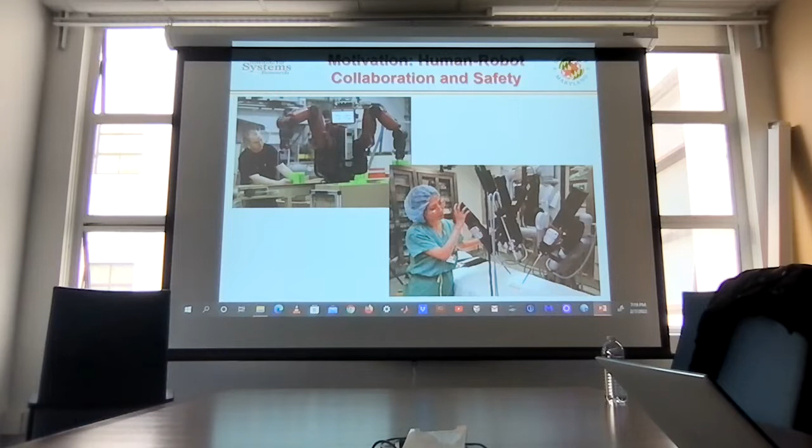We also work a lot on the fundamental problem of teaching robot tasks. We have a way to do it we think is more robust. And in this context, of course, human-robot collaboration is very important. And one of the issues that I talk a little bit about is what do you mean by teaching and how do you do it in such a way so that you can teach in one environment and transfer it to another easily, and you can teach one robot and transfer it to another, like you do with humans, okay? And there are some nice pictures about collaborative robotics, both from commercial and medical.

And for those of you who are in networks, this is also applicable to current communication networks, like especially 5G, 6G, and next generation, because the new topic in networking is autonomy. You try to do the management of networks autonomously, and that should be very, very good news for control people, because everything now has become software control, thanks to software-defined networks, network function virtualization, and the like. In a simple language, we are making the entire network virtual, and everything that you do is actually a control problem. You don't worry about the hardware anymore. This is thanks to Nick McKeown, who did it for core networks, and now we're extending it to 5G, and there's some very interesting problems there. That's why I put that slide there.

So the key challenges are, safety, of course, is very important for trusted autonomy, and what can be learned. And you all know from your student days that you don't learn if you don't make mistakes, right? If everything goes rosy, you don't learn much. So one of the issues is, can you actually push the system to the limit of learning, but not faulting? And that trade-off, in my opinion, has not been understood, it has not been studied a lot, about how do you learn more by pushing the system to the learning and then learn and go on.

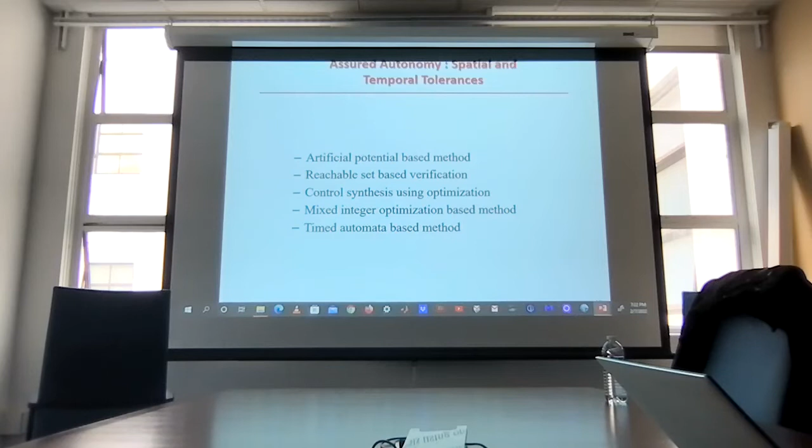Okay. So there are several methods. You can do autonomy for single or multiple systems. We have done all the work on artificial potentials with Xiaobo Tan and others. There's, of course, the work on reachable sets and appropriate verification, the barrier functions that we do here, also with reachable sets, and control synthesis using optimization, including logical constraints that lead you to mixed integer programming. And if you are into model checking, actually, you can do that with model checking like UPPAAL and so on and so forth. And I'll touch on these things, okay?

So let's go to the old work. You have a bunch of robots, and they try to go to the target. They try to avoid the obstacle. The selection of the obstacle to have a cusp is special. You will see why. Because the robots are going to get caught there. Okay. So you try to do the old approach where I do potentials and combine them, like you see here, with different coefficients. They sum up to 1.

And you have a target potential that attracts you. You have potentials that try to repel each from each other. And you have objects that try to repel you away, and so on and so forth. The problem, of course, with these methods is that even if each of the potential functions is convex, the combination is not convex. So you get into local minima and all kinds of problems.

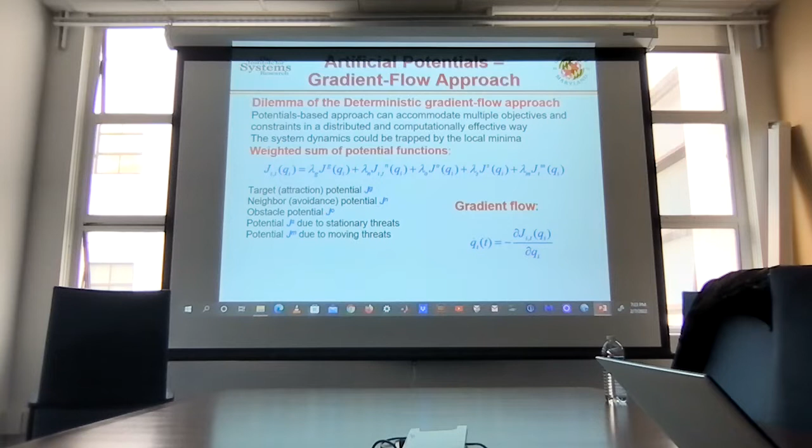So what we did is, as they say in optimization, be wise, randomize. Okay, so we randomize the problem instead of doing the gradient minimization. Instead of minimizing V, we maximize e to the minus V. So you go into large deviations and these problems, and you get to randomized algorithms. The penalty we pay, of course, now is that your constraints are going to have some probability of being violated. But we saw with Xiaobo that this leads to path optimal solutions. Okay? And I'll show you with pictures. It's a remarkably simple theory.

All right. So then I can move around with the potentials that you see on the right-hand side. And I'm exploiting the fact that I have a Gibbs distribution. And basically, I move around by throwing dice that are loaded accordingly. Remember, I told you minimize V, maximize e to the minus V. V has a sum like that, so it depends on these local potentials. Okay, so this works pretty well. And this is inspired by similar methods in image processing. We have the name Gibbs sampling, all right? So it's the same idea.

This is old work. There are 2 papers in Automatica, and you see what happens. You go to one place, you want to go somewhere else, you create probabilities, you throw your dice, and you move, okay? Statistically, all right? And there's a very good analysis of that in these papers, and you see what happens. Now you don't get stuck, but you pay a price. The price is that this is slow because they keep searching. So you don't do exploitation, you do just exploration, and that's too slow.

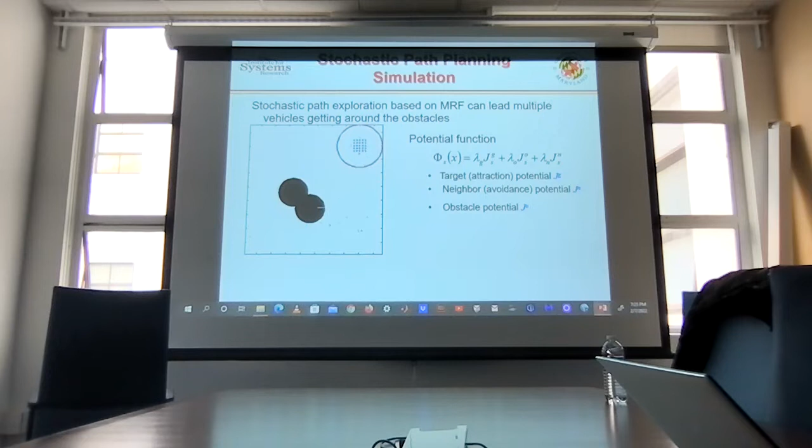So we did a mixed method where you do exploitation for a while, and then exploration. But we still don't have a method where you switch from exploitation to exploration automatically. We just put it in, okay? So the simplest example is I tell you there's a very nice restaurant downtown in San Francisco. You use your map, you go in the area, you don't see the restaurant, you start looking around, okay? That's a very simple example. Now, these methods are extremely simple, and you can make the collective do all kinds of things, like figure 8s and so on and so forth, lines, by very simple potentials.

I'll show you some here because that's old work. We are revisiting for various reasons. Let me see. Okay, that's the rendezvous point where you tell them where to rendezvous, and the other one you tell them just get together, and you see what happens. They first cluster in groups, and then the groups cluster. And there are various things we're looking at.

This we expected. The remarkable thing is that we proved in the thesis of Wei Xi, who is with the company here in California, and then people at the U proved the same thing, that the methods are very robust to the functional form of the potentials as long as the functional form has the right qualitative characteristic.

Okay, so as long as the potential is like that, if you want to keep people away or like that, the actual functional form doesn't matter, which means that I can actually fit arbitrary functions with very simple measurements. So some people have done like measuring just the distance and then fitting an appropriate distribution and then running it, okay? And even more so, you can actually take the gradient and interpret it as even simpler.

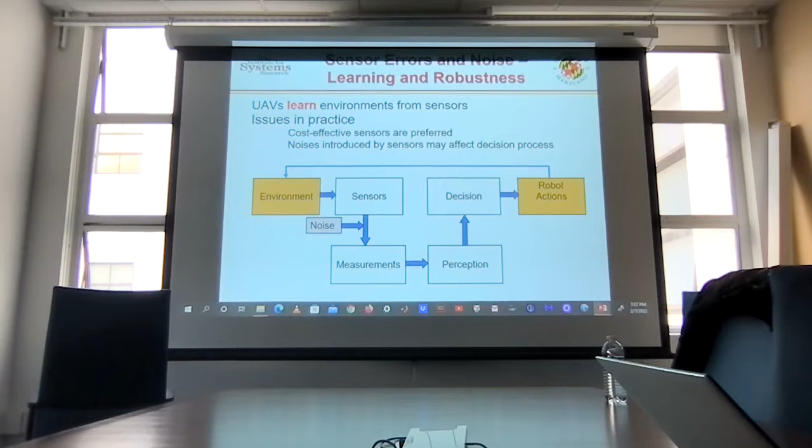Because we work on another project, trying to recover the collaboration laws of ensembles in recent work with DARPA and Park from birds and UAVs and so on, we saw that there's no uniqueness in this construction, but this is not weakness, it's actually robustness. Because if you have many potentials that give you the same trajectories, you now can ask yourself, what is the simplest form? So that's one method, okay?

The second method is the one you know about, reachability analysis, in terms of constructing tubes and then following these tubes of the nonlinear system. Here we use the zonotopes of Matthias Althoff from Munich, but you can do others. You can use ellipsoids. Essentially, you look at the tube and you take slices and you try to project it.

The more recent work we are doing in this area is inspired by the modern cars that you see. You have a big screen in your modern car, you see a tube in front or back when you park. This is actually a tube. So we try to do it faster and use it as a method to drive the car or many cars and so on. And you'll see this later. There's still very active work in this area, trying to make these computations fast because currently they're not.

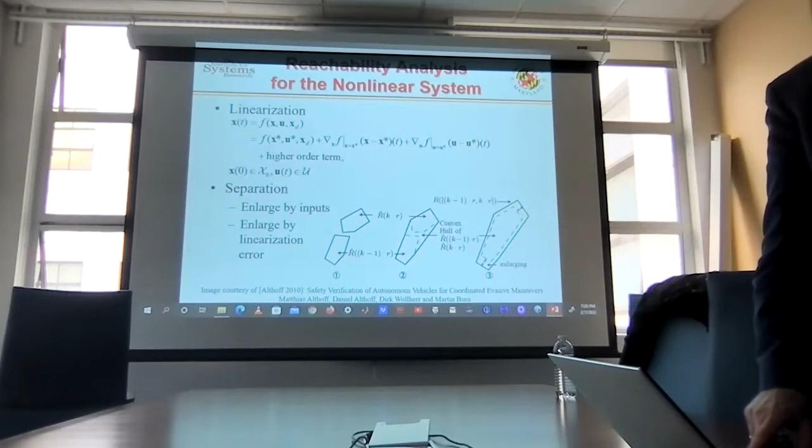So here we're trying to calculate these reachable tubes from two aircraft in such a way that they avoid each other and they allow a maximal set of controls that satisfy these tolerances. If you find that first, then you can actually find the controller so that you do optimal time and so on. Okay, so there have been many approaches to that problem.

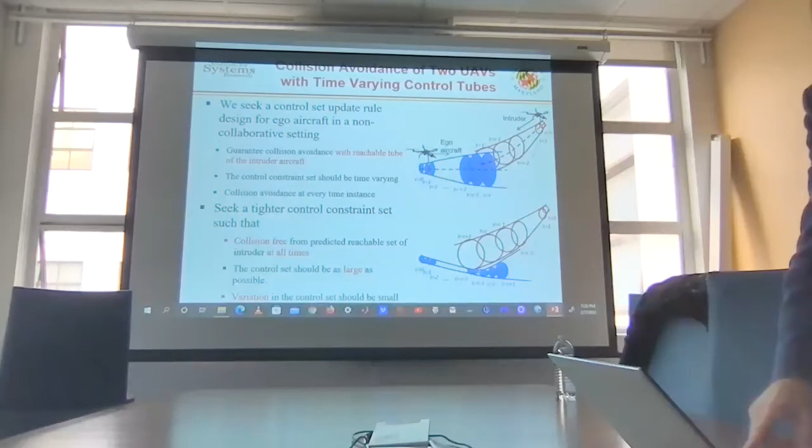We use MTL, metric temporal logic, or metric interval temporal logic, for the simple reason that my constraint is I want to go through this door in 10 minutes plus or minus 2 seconds, and I want to allow some tolerance from the border of the door, like 10 centimeters, okay? So it's finite time constraints you have, not I want to go eventually to the door. And this is captured by MITL.

Of course, the difficulty is that even in MITL, you don't always get timed automata; for some subclass you get them. So the problem is a bit more difficult because definitely for metric temporal logic, you don't get timed automata all the time. But we use an old method that I think was done at Caltech and other places where you take the logical constraints and you turn them into integer constraints.

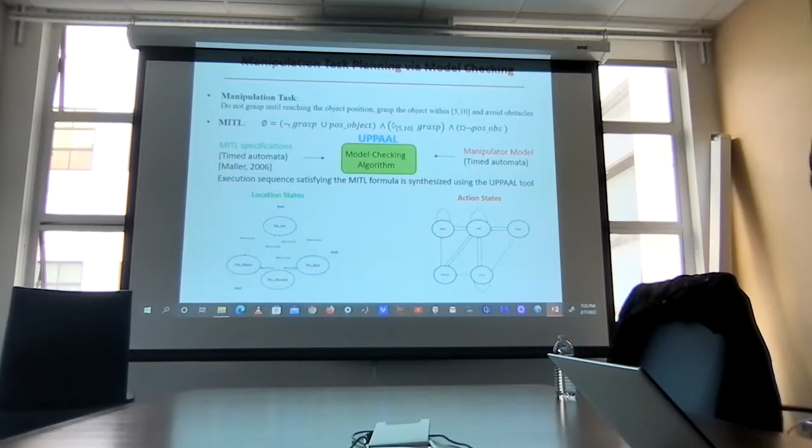So, for instance, on the left-hand side, you see a timed automaton characterizing the movement, the location states. And on the other side, I have the action states, like I move, I hold, I grasp, and so on and so forth. Both of these are timed automata. And then I can put this into a model checker and find out if there is a possibility to find a path to execute this with certain constraints. And you get this model checker in UPPAAL for this problem where this robot is trying to grab something from the left-hand side, go over the object, and put it over there.

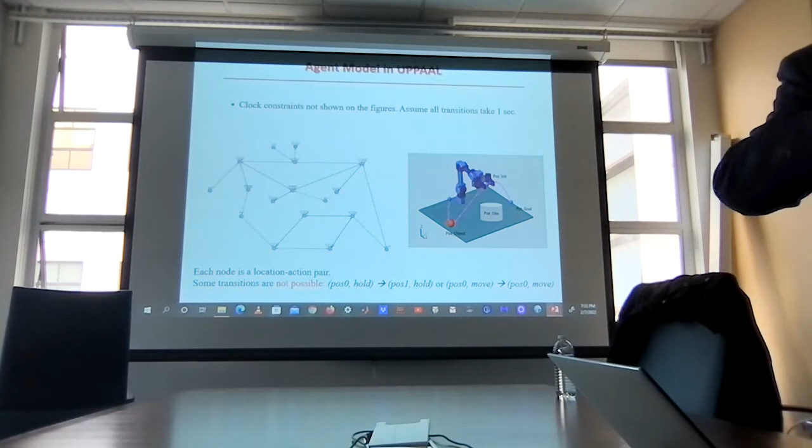And the model checker, as you know, if you know model checking, not only will tell you whether it is possible, it may provide a counterexample, or it will give you a fix. That's why we like them. You get these kinds of answers for the path. And if you can do this in your head, I'll give you a big prize. So you get another alternative of doing the same problem by using these model checkers.

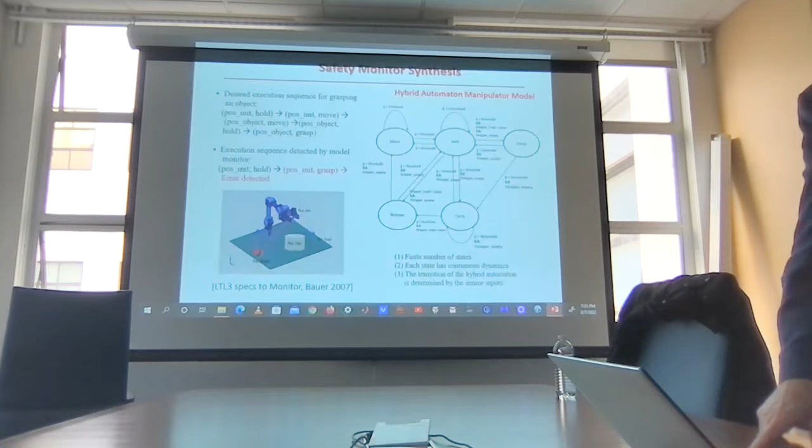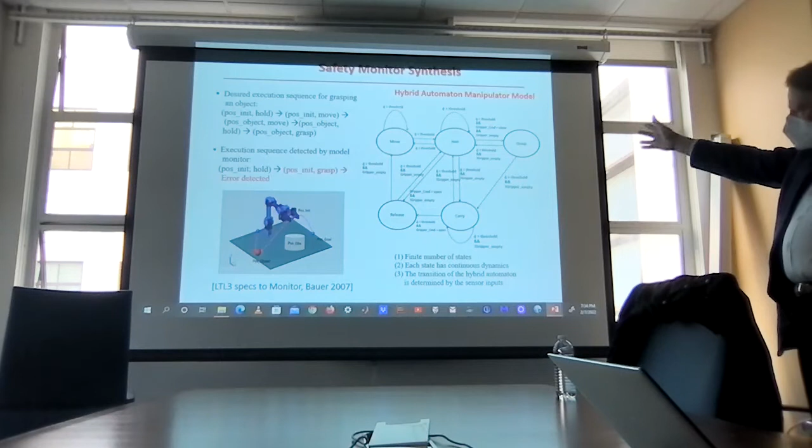And then the interesting thing here that we do with my students, one of whom is now at Google, is that if you have such a model, you can actually create a hybrid automaton like you see here, again of the timed automaton type, but now you can build an automatic monitor of the automaton, and that monitor is an analog, if you like, of an observer from systems, right? This logical system, which you build automatically again, monitors the execution of this task, and it can alert you if things are not going properly and so on and so forth.

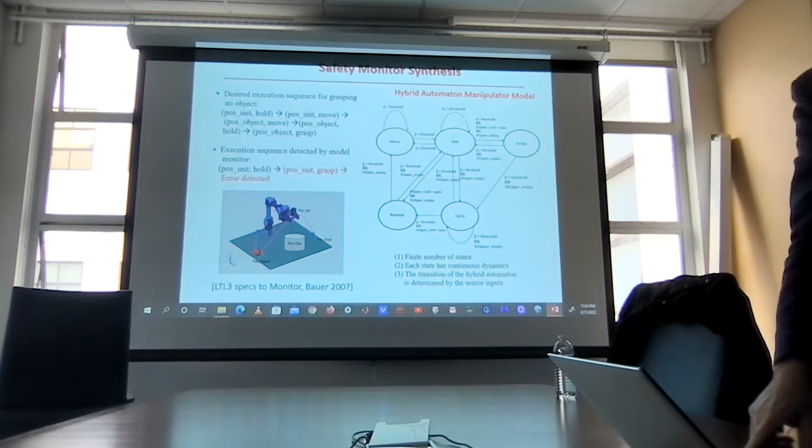So, for instance, here you see this monitor, very simple. It checks whether some state is a bad state, or some of them are alarming, or some of them are good states. You can use these automatically synthesized monitors for monitoring, or also as a base for reinforcement learning later on, if you want, with these hybrids.

Okay, so it's a first step towards this time and space synthesis, and you can actually put this together and even understand problems like this, where you have nonlinear dynamics and you have an STL fragment of the constraints, like I have here, and then you can use this to actually get event-triggered control in the sense that the triggering is when something is not as planned.

Okay. So when we say trusted autonomy, in the most general sense, in our work, we mean that the task execution is not as expected or as planned. Something is not going right. And that can be because the environment changed, because the model that you have changed, or because the way you're doing it is not right. And you have to figure all that out.

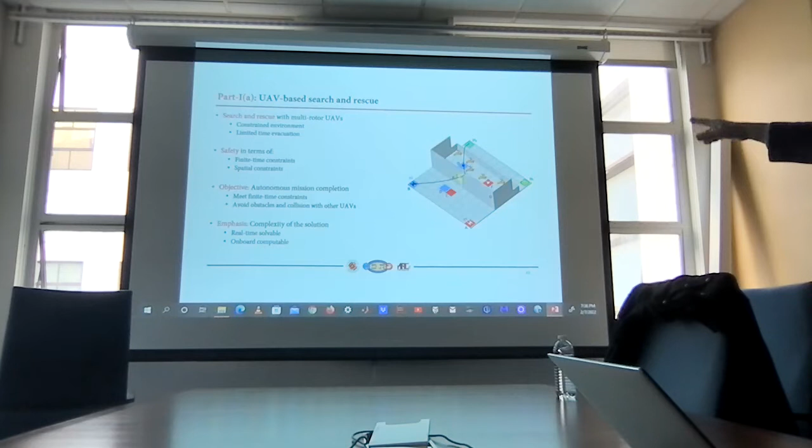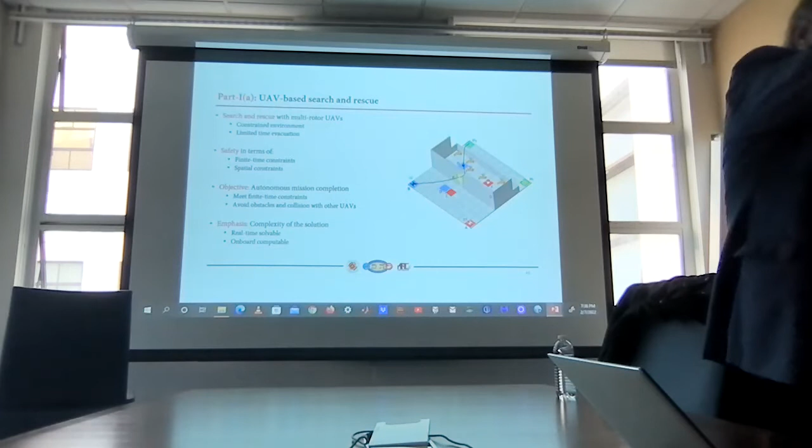Okay, so in the search and rescue, there's this problem. Of course, safety is with respect to passing through the window with some space tolerances, but there are multiple problems. So suppose the UAV goes to the window and finds out that it cannot fly through the window that way, it has to do that, and it calculates it doesn't have time to do that. So what we do in more recent work is the first UAV tells the second UAV that it has to do that, goes around, this one turns, goes through, and the other one comes back. So it's much more complicated logic. You can do all these kinds of problems.

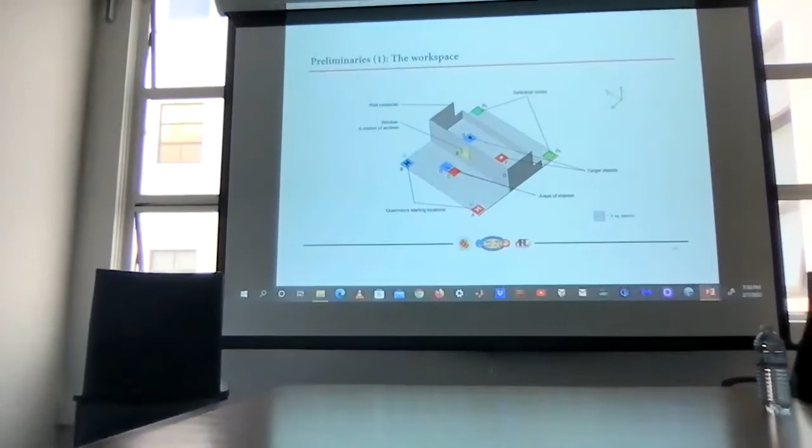So this is the model. Okay, so now you exploit the atomic propositions in this logic, and you take the statement you have on the left for MTL, right? And you use the semantics and you decompose the global logical constraints to individual constraints, okay? So that's the constraint we have on the bottom. And these then give various constraints for each of the UAVs.

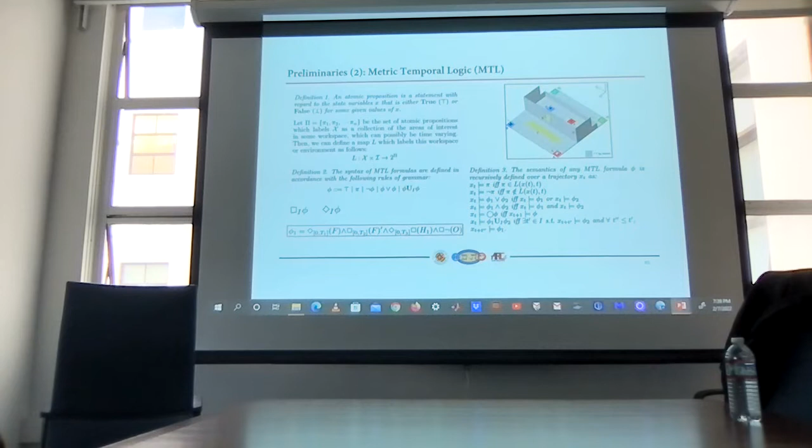And I think this is coming up. Yeah.

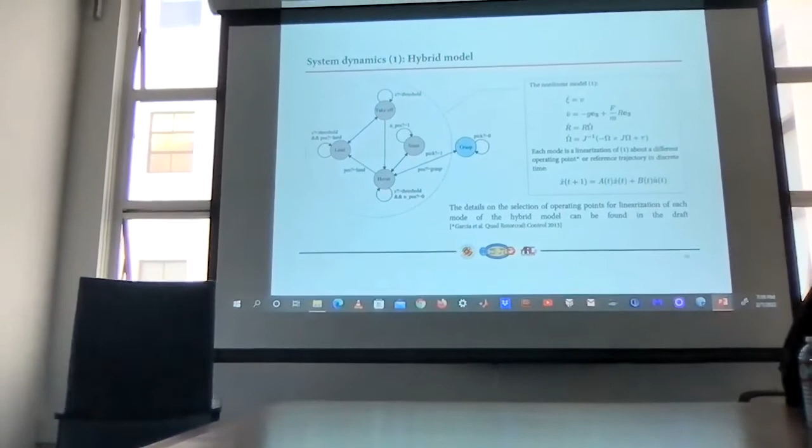Okay, so the system dynamics is a hybrid model that shows you the various functions of the UAV. I take off, I land, I steer, and so on and so forth, grasp. You have the classical model of the UAV, which many people are using. And then you have the Baras model over here. And you take the object, you put them together, you have identified the automaton. Okay, and every UAV can satisfy that.

So here is the mission. I write a formula down in metric temporal logic. Every time you see these subindex intervals, that's the difference between LTL and MTL. And you have to find the object location, then you go to the safe location, and so on and so forth. And for instance, for quadrotor Q1, the corresponding mission looks like this.

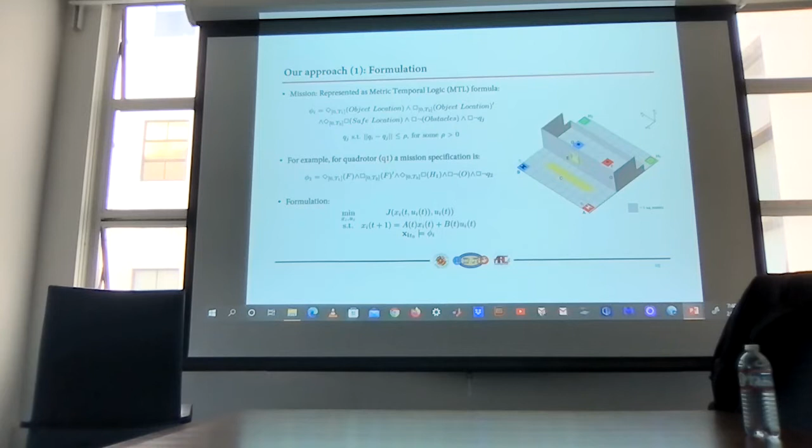And you can have this problem where for each UAV, you see there's an i there, you have an optimization, its dynamics, and the logic for that UAV. Okay, so I decompose the big problem using the decomposition of the logic into subtasks for each UAV, solve the corresponding problems, with several papers that we have on that, and then you put them back together. So given an MTL specification, there are decompositions for each of the UAVs, and then I can solve this problem and put it back together.

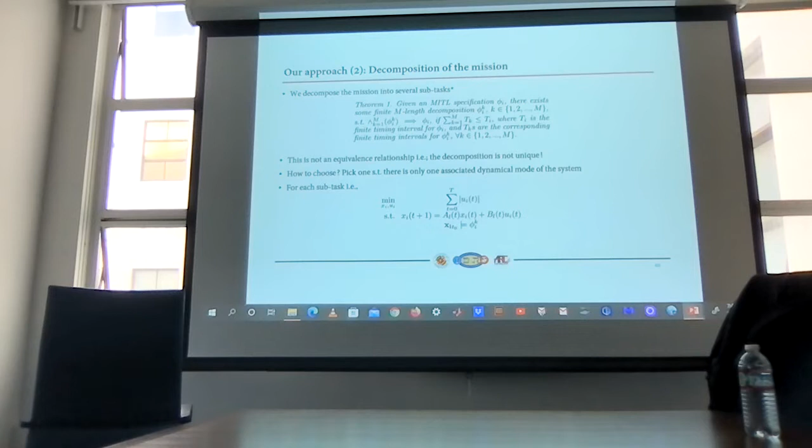There are things you have to choose here, including the time horizons for the sub-problems and then how to put them together. Okay, so we do the same formula. We turn the MTL specifications for each UAV into these integer constraints. So we go from a large mixed integer programming problem to several smaller ones. We solve them, we put them together, and then it works, right? That's this approach. These are the subtask formulations.

How do you choose the standard for the subtask? So there are some, like the times in particular. Yeah, not much else. The other things come from the decomposition of the mission of everybody, right? So for instance, if I have two UAVs, who comes first? So I have to specify that, because not both of them go to the window. Can you just do that manually? You try. If the problems are small, you can try different options.

Usually, it can be done online by seeing who is the closest one. For instance, in the example I showed you, where it has to turn, this guy's going to go away, so the other one's going to go first. If it can go first himself, he goes first, and he decides that by measuring the time to crash versus the projected tube, and then he decides that it can go through and goes through.

Okay, so the key idea here is that I take a large problem, decompose it, solve it, and put it back together. And in the examples we have done, even on laptops, this can be solved pretty quickly, when we use these kinds of tools that everybody knows. So the overall solution, of course, is not optimal anymore. You have suboptimality, but you cannot go for the optimum because of the computational complexity of large mixed integer programming problems. And so the key idea is that this way you get at least some scalability.

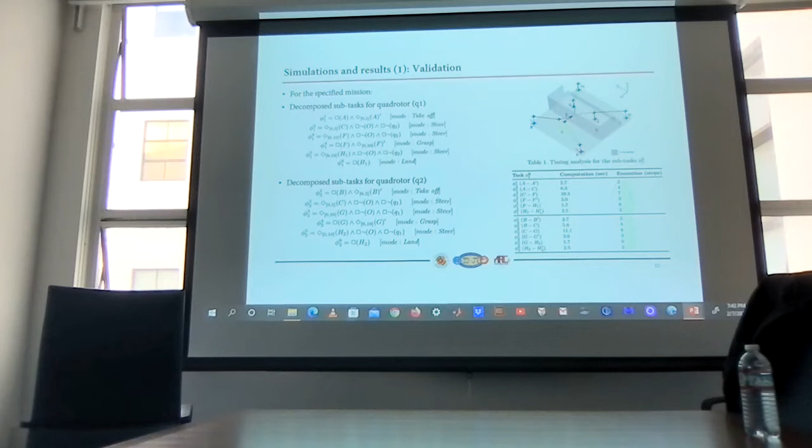Here are some examples. I don't know if you can see them. So the computation is anywhere between 3 seconds and 10 seconds. This shows the decomposition of the various subtasks for quadrotor 1, quadrotor 2. These are all expressions in MTL. If you're interested in details, it'd be better if you go to the papers and look at them. And we'll be happy to give you the software so you can reproduce our results. Nothing difficult here in terms of programming or computation.

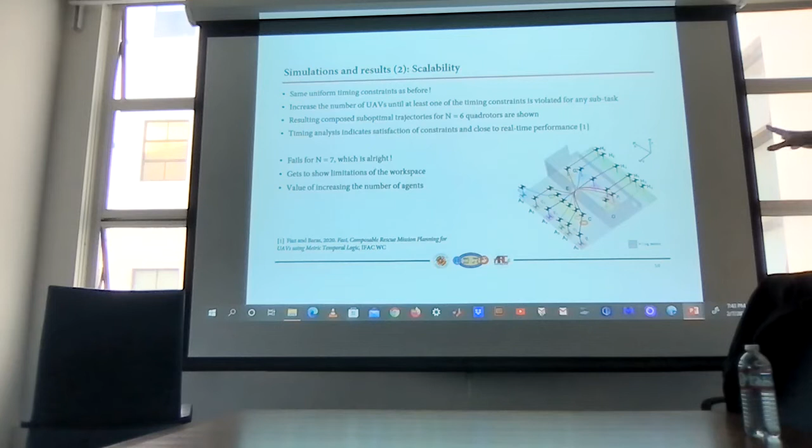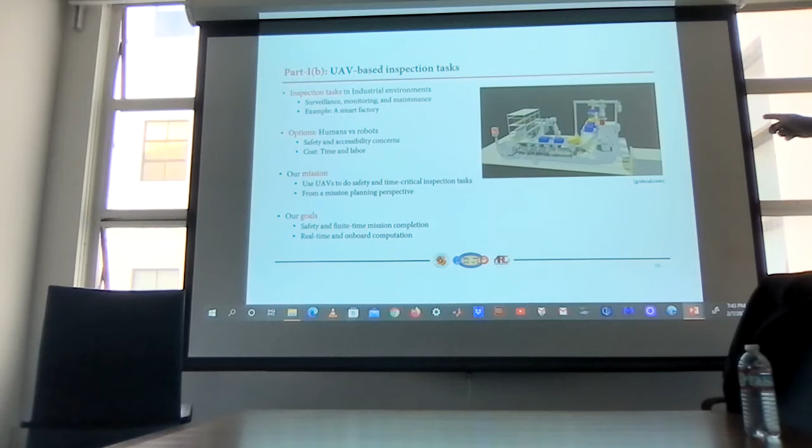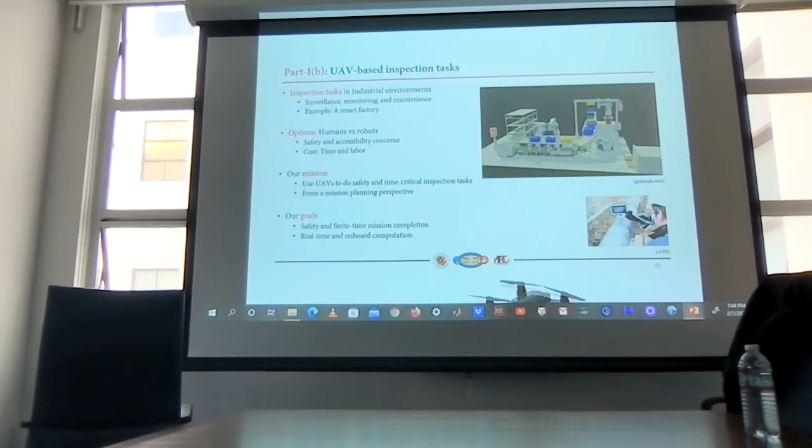And here is a bigger one, from the paper at the last IFAC Congress, where we have several of these doing the problem. And that's the other example we did with ABB for monitoring signs in a factory for problems. A production line is stuck, you have a leakage, you want to send somebody to inspect it, and so on and so forth. So these are similar kinds of things. This is an actual factory that we did this for with ABB, about 2 summers ago.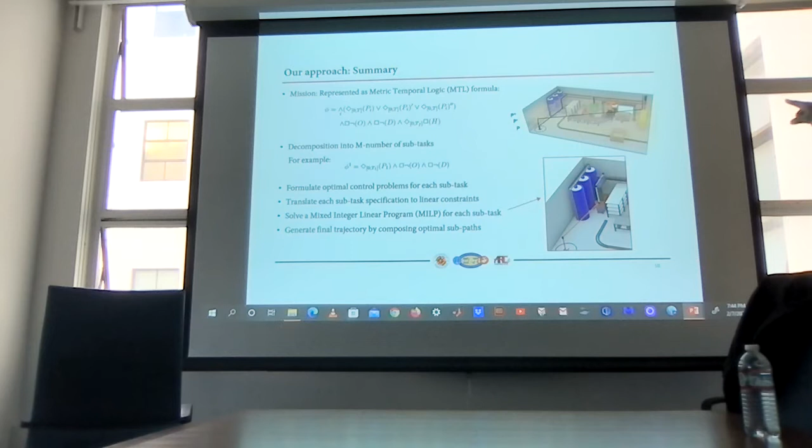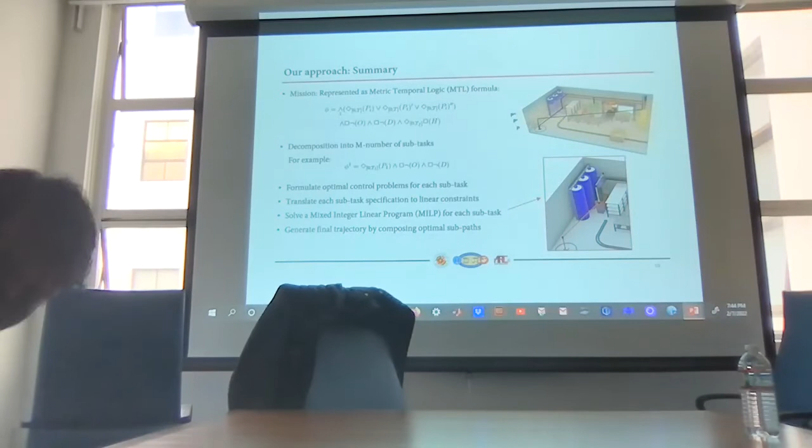Sometimes here in these factories, you have to go to these places and spend more time. And you have the pipes and stuff like that. Try to find if there are problems there and so on and so forth. You can write those down. In MTL, it allows you to say, go there, stay for a few seconds, inspect it, zoom if you like with your camera, see if there's something more, and then tell me.

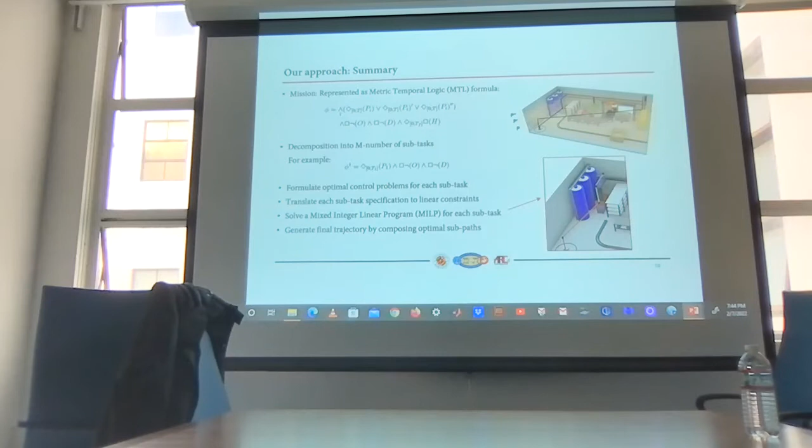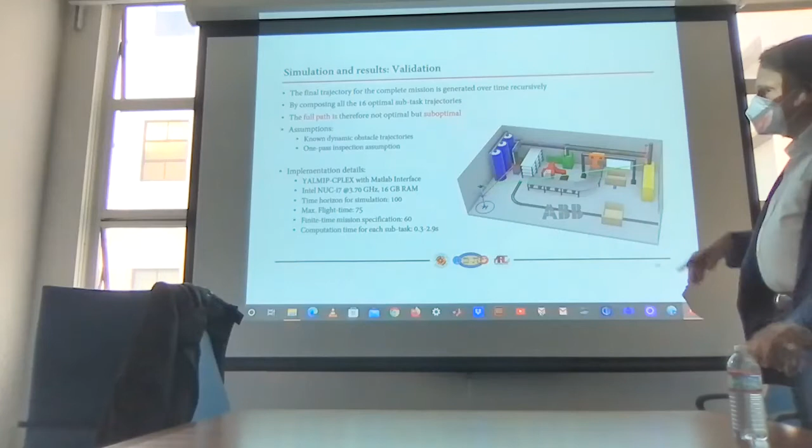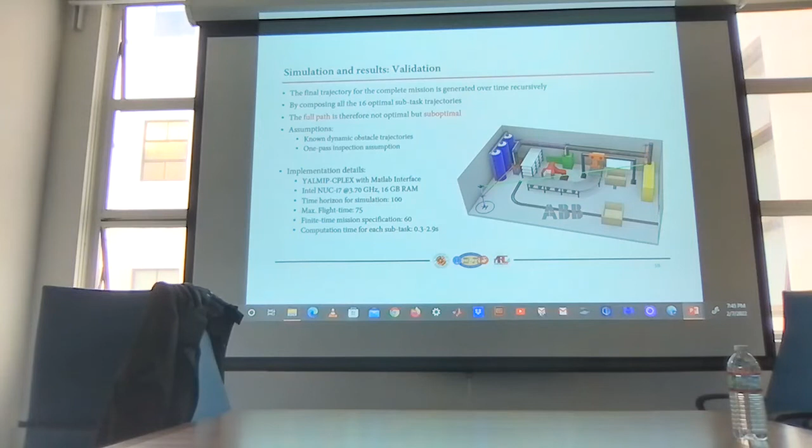Okay. We've done similar things for monitoring airports, where you can go to the building and stay longer and so on and so forth. Again, some of the implementations, you see this is not a very special laptop, and you see for each subtask it is between 0.3 to 2.9 seconds. So this is definitely executable with not a lot of computation power.

Okay, now I'll go to something else, which is the first attempt we made to try to go after this robustness of time and space with my student Zheng Yu Lin. We're trying to do path planning. This is a very simple problem, but we wanted to have some robustness in time and space, okay, in the path planning. So we use STL. This is the same kind of example where if you change the X variable, one of these specifications in time may be violated more easily than another, which is the key idea in STL.

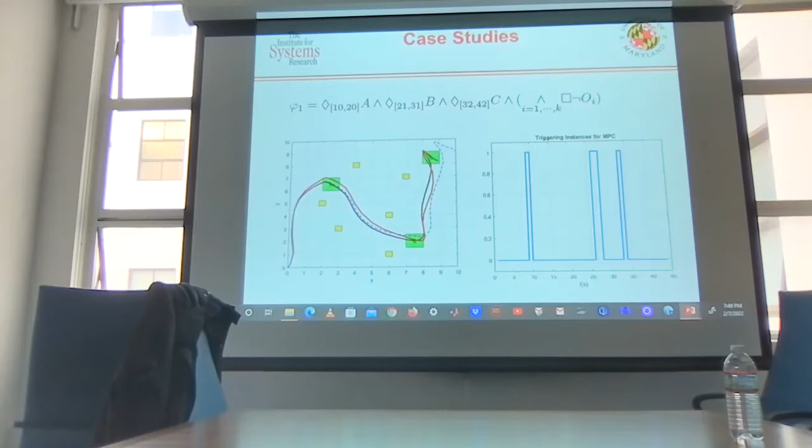Or you can get a more difficult problem where you have things like that, where you get more. The problem is more complex now, okay? So you need to have more event trigger control. Essentially, the event triggering here is when you deviate from your planned trajectory and you are at risk of hitting stuff. But this all comes from the theory. I think there's much more to do here, and I think we just scratched the surface of time and space robustness. It's a very important problem, okay?

Okay, now I go to another piece of work that we've been doing for many years with Yiannis Aloimonos and Fermüller, which was how to teach a robot to do things like making a sandwich, cooking an egg, cutting a piece of bread. But we did it by having the robot observe a human. Now, why is that the case? It's because we believed first, and then we showed that this way the training of the robot is more robust than programming. And this a lot of people know.

So in this context, the robot can see you, or you can see a video. And this example here in particular shows an instance where the robot was going over a plate, and we didn't want it to go over the plate, so we grabbed the hand and said, okay, dummy, this is a better way to do it. And this was registered, one sample, and it improved later on because we told him that this was not very good, instead of having him learn.

I want to stop here and give you a basic idea that we're working on, we have not yet completed. The idea is the following. I am trying to have the robot learn a logical description of the task. So Aloimonos was using certain languages, I'm using timed automata for this. So if I want to screw a screw, I have to do a timed automaton. I have to take it, grab a screwdriver, whether it is Phillips or not, put it in the screw and start turning for the amount of time.

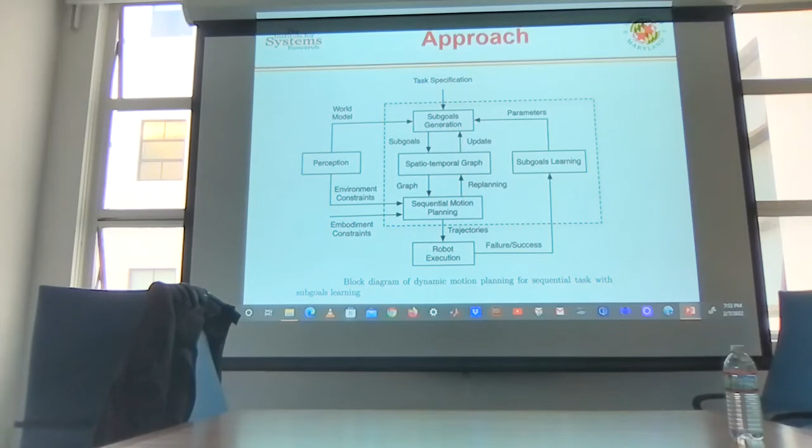And in this context, we did several things. For instance, we tried to understand how to characterize motions by finding various motion primitives and storing them as atomic things, and how to combine them, and how you do adaptation of movement for planning to avoid obstacles, and also how to use attention mechanisms, the sensors, to try to focus the sensors on only things that matter. So that's basically the structure of our approach. It's what I would call more goal-oriented planning than anything else. And we have a long history on that with my colleagues there now and others.

All right. So there's work here that has to do with attention. I'll skip it. Okay. Let me go on. You're going to hear more about that part when we talk Thursday, because it touches on something that I have developed for many years. It's called model-based systems engineering. And it's very systematic, with languages and models and so on and so forth.

And we try to embody all these ideas into this framework, because of what's missing right now, and we've been asked to do that from many agencies. Here's the question. We have invested literally hundreds of millions of dollars in autonomy, and still we do not have an integrated tool suite that you can sit down and design a robot, including the materials and the geometry and all that, and test it, and then go make it. And what you make is very close to what you design.

Keep in mind that this is happening in aircraft. 777, 787, and all these aircraft will be designed by this approach. You first do everything by this model-based systems engineering, that Dassault Systèmes and other companies are the experts in, and then you go make the single screw. This has been going on in cars, but not yet successfully. And now everybody is asking for this approach to anything that we make.

The reason being now is because you can go from software to implementation by things like additive manufacturing and 3D this and so forth. Okay. So in Germany, there are labs that can create very delicate medical instruments that go from the lab to the hospital by following a similar approach.

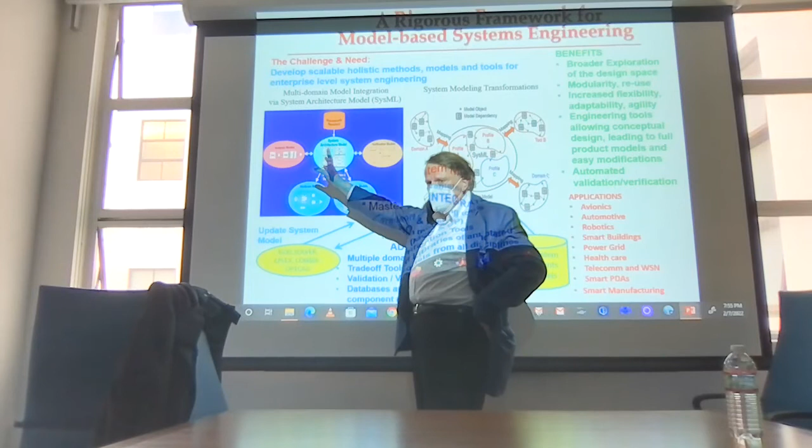This is the slide where I captured what we have done in model-based systems engineering. You basically have to integrate different models. And we use the Systems Modeling Language, which is a modification of UML, which allows you to integrate physical models of all kinds. Sometimes you have to use meta-modeling to capture them.

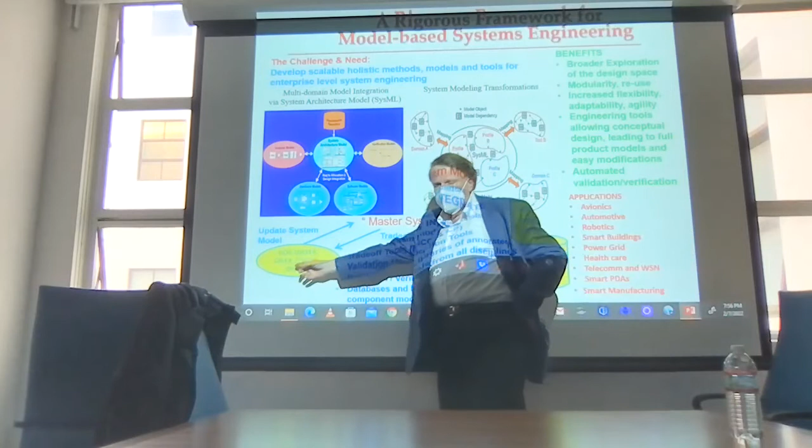All right. Then you link this integrated modeling tool with trade-off analysis, where you have to be able to handle both optimization and logic. Like, for instance, the logic solver and CPLEX that IBM has unified in their optimization suite. And then you have this problem that is still open, that companies have been asking us: how do I find components that I designed many years ago, and they're represented in different ways, but they are similar to what I want, and take them out and put them into my modern design and so on and so forth. I'll tell you Thursday what we have been trying to work on the last 2 years on this model.

Okay, so we have developed that a little bit further to try to go to autonomous systems, and the key is this, the requirements analysis. Meaning you write down various specifications, mathematically they translate to constraints or metrics. For the problems we're talking about, they will have hybrid variables, Boolean and numerical. And now you have a beautiful problem of how to verify these things. In our approach, we integrate everything from timed automata, model checking, contracts, and even sometimes automatic theorem proving to try to get the specification of the requirements. Okay. And more about that.

All right, I don't have a lot of time, but I'll show you this. We wanted to find a simple example to show that this trusted autonomy is a useful concept. And by that, I mean, again, it can self-monitor, self-learn, and self-adjust. And I thought that the problem of picking up a cup while you're pouring something is a simple enough problem, right? And I went around the world and they told me I don't know what I'm talking about, because this is not an easy problem, okay? Especially if you want to do it honestly, which means you don't pick a glass, because then you can squeeze it, but you do it with plastic, okay?

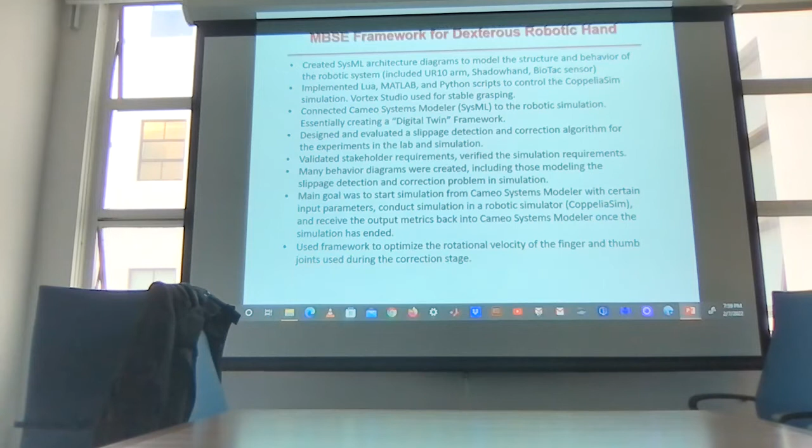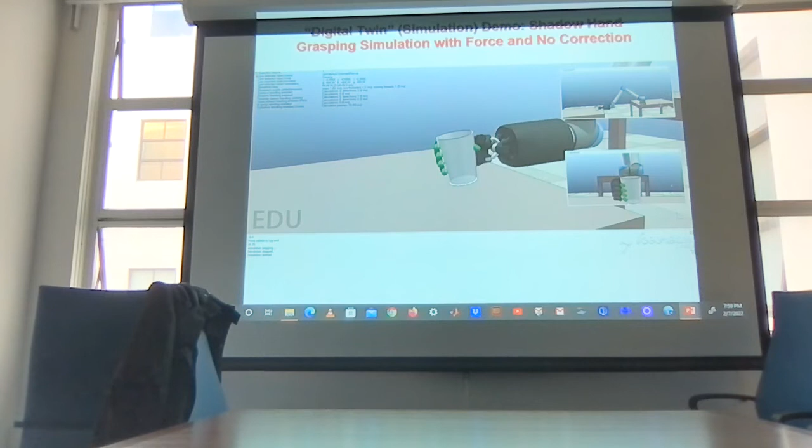And here we did something else that's very important for model-based system engineering. It's called digital twin. The digital twin is you make an accurate simulation model of the process. You use this in manufacturing. This is going everywhere. You use it to experiment, to design against, and when you're sure that you have something good, you go in and implement it. We did it here by doing very accurate simulation of this hand by using standard tools from simulation of robot hands and rods and so on and so forth.

Let's see here what's happening. It's kind of slow. All right, so it won't be a lot of fun. I'm going to go through and show you the real movie. Here is the movie. So you can see it, if it plays. Yeah. Okay, so this is,

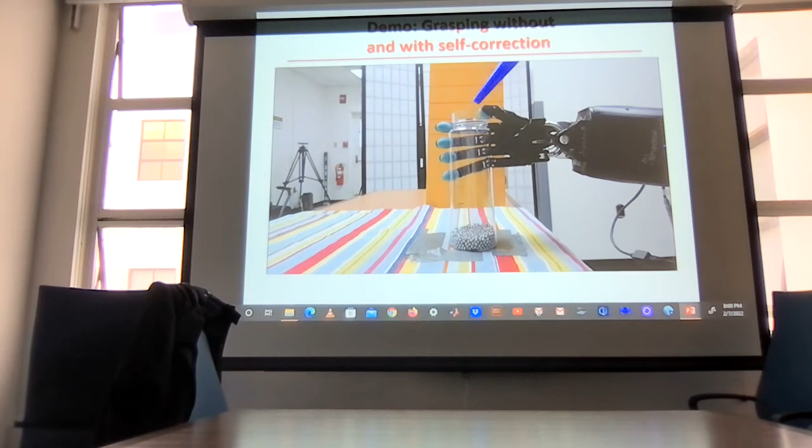there's no self-correction. So even with the glass, it slips. Then we adjust the hand. Actually, this hand is very bad design. Sometimes it gets stuck according to the location of the fingers. You can do nothing about it. And we're now looking at much cheaper grippers that actually have full plastic fingers. You can do much better. This is the plastic stuff. And you notice that after it squeezes a certain time, it stops because it doesn't want to break the cup, right?

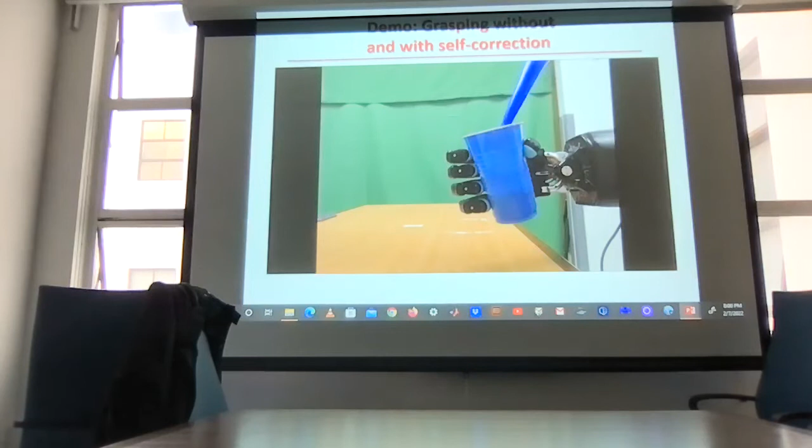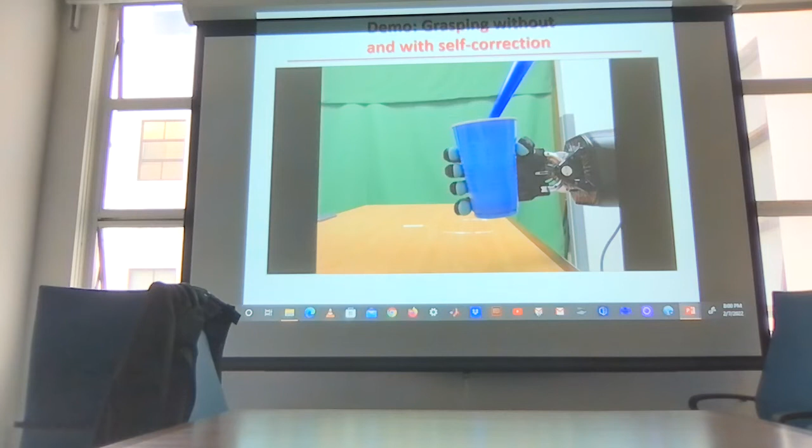It's mostly haptics. So that was my introduction to haptics, and I started learning haptics from my colleague in Germany, Sandra Hirche, who's an expert on it. Okay. All right, so you can watch it; I'll leave the entire talk here. I'll go to something else.

Okay, so suppose now you have some understanding of autonomy for a single agent. What do you do for multiple agents? Okay, and one problem I find here in the literature is that most people, when they talk about networked control systems, they have this network, the bottom one, which is the communication network. In our work, we consider the collaboration network, which can be logical. I can collaborate with you, doesn't matter where you are, because we are in the same organization or other reasons, okay? We have the communication network, which basically says who communicates with whom and what and when.

And quite often you have a middle network that is the information network. So in the bottom layer, there are data. From the data, you extract models and other things, policies. Where do you store those? Right? So these multi-graphs, they have nodes. The point is that these networks do not coincide necessarily.

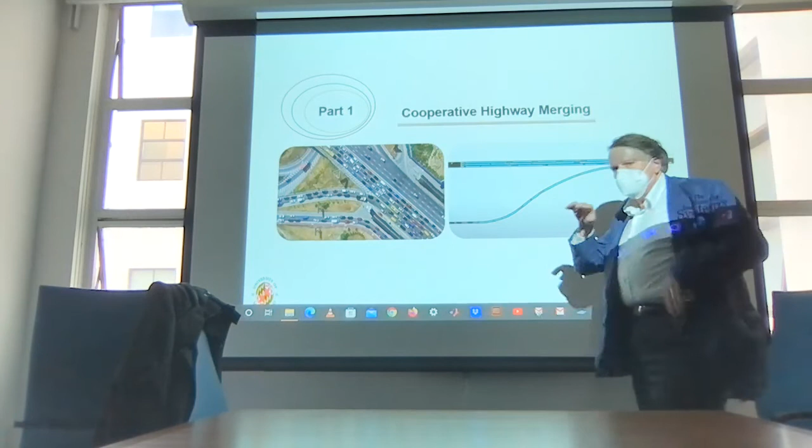Okay, now I have another talk here, but I'm going to skip because this I added after the discussion in the afternoon about cars. So one application of that is in autonomous vehicles problems. These two problems are work of my current student Nilesh Suriyarachchi, where we looked at merging. So I'm trying to merge. I have a flow here and a flow there, and I'm trying to do it nicely by interleaving and not slowing anyone. There is even a patent that Google has in this problem. It's an important problem for autonomous vehicles.

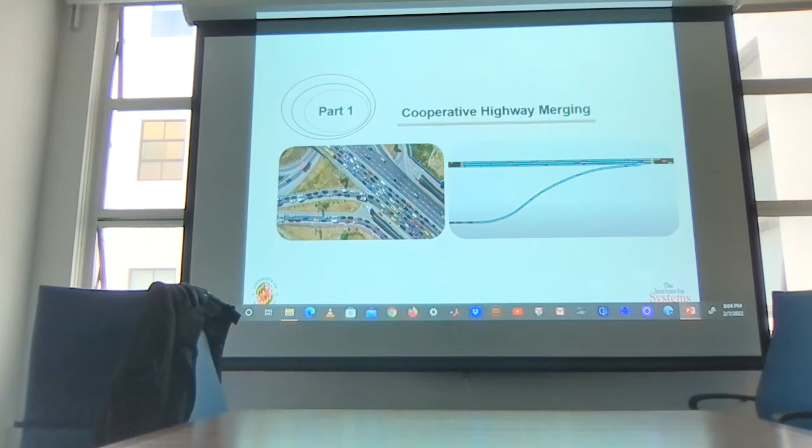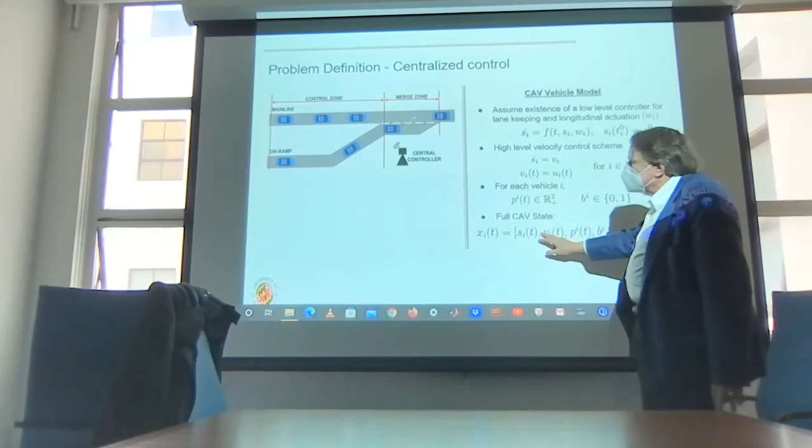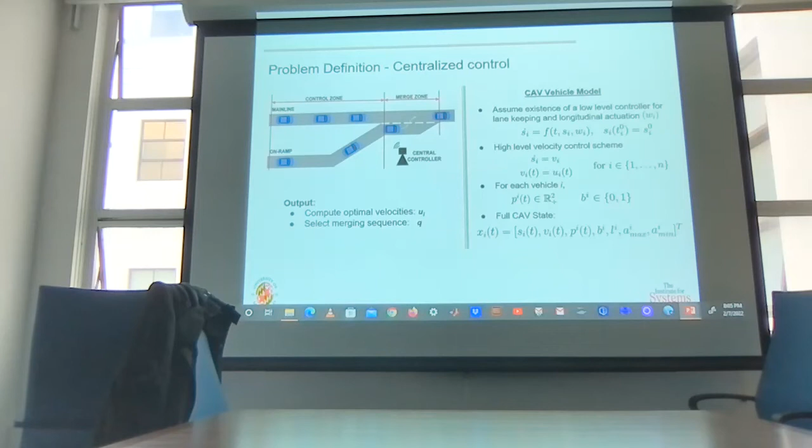We formulated it as a centralized control problem, the dynamics of the cars, various parameters, trying to show that you can interleave, the cooperative control problem. And we have several results here with centralized control, decentralized not yet. This comes back to a question that Professor Sack was asking me about how you can group together the vehicles to see if you can coordinate a smaller group and then coordinate between the groups, which happens often in this problem. Anyway, these are some existing methods. You will see all that. I'm going to go to what we did.

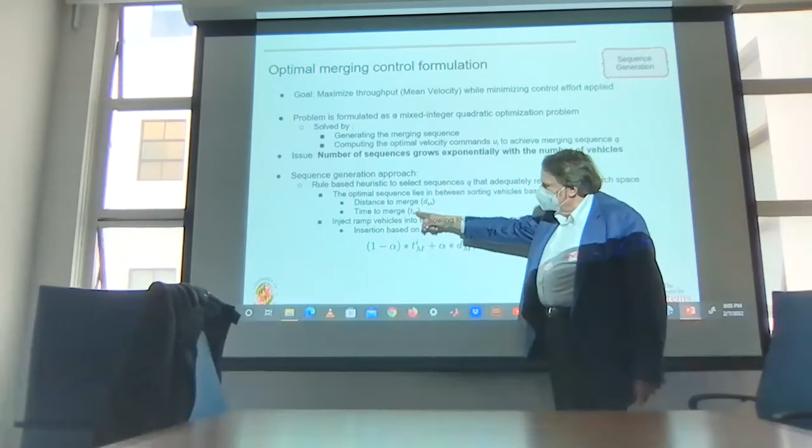So what we introduced was heterogeneous traffic, where we have different types of cars, different velocities, different speeds, and different priorities. So we solved the problem with more complexity than was done before. That paper got the best paper award in the Intelligent Transportation Systems conference. And the key idea here were these time sequences. They are linked to distance to merge or time to merge and so on, and you try to estimate them and get a heuristic.

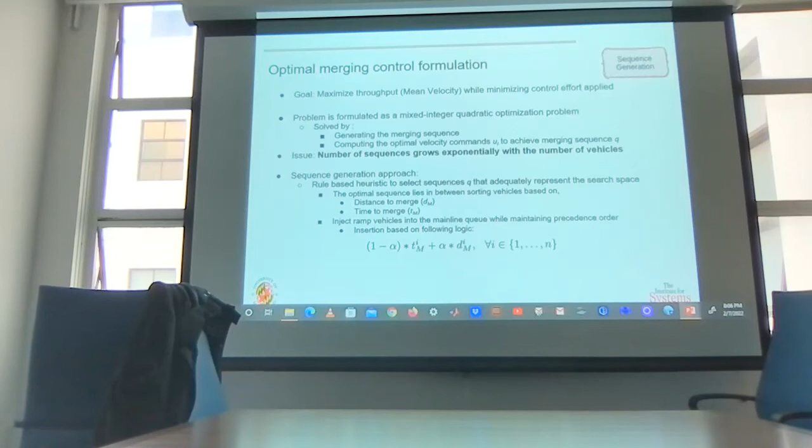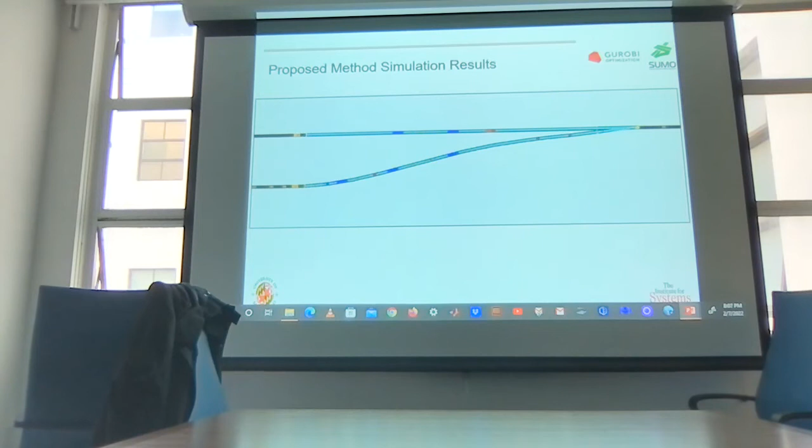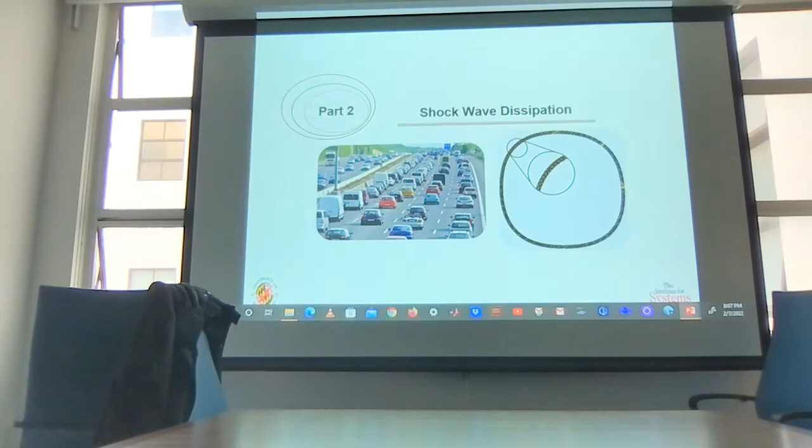All right. So the second problem, which is very interesting, there's a lot of work on it through the years, the last 5 years particularly. We tried to implant autonomous vehicles in a heavy traffic situation to diffuse congestion. And the congestion manifests in the traffic fluid flow as shock waves. So we did this work also with the references.

So we tried to simulate the shock waves, and the key question here is to try to locate this autonomous vehicle so that you can sense the generation of the shock wave as early as possible. It propagates backwards, and what this autonomous vehicle is supposed to do is try to slow down everybody so you don't get this congestion. Because once you get the congestion, everybody goes bumper to bumper and this goes backwards. It's called the backward propagation shock wave phenomenon, which we have known for at least 50 years.

All right, so you have to model the humans here, very statistical in terms of velocity. There's a model due to Krauss, which has two parameters, in terms of how people adjust their velocity and their reaction time. You have heterogeneity here. Some people are fast reactors, others slow reactors.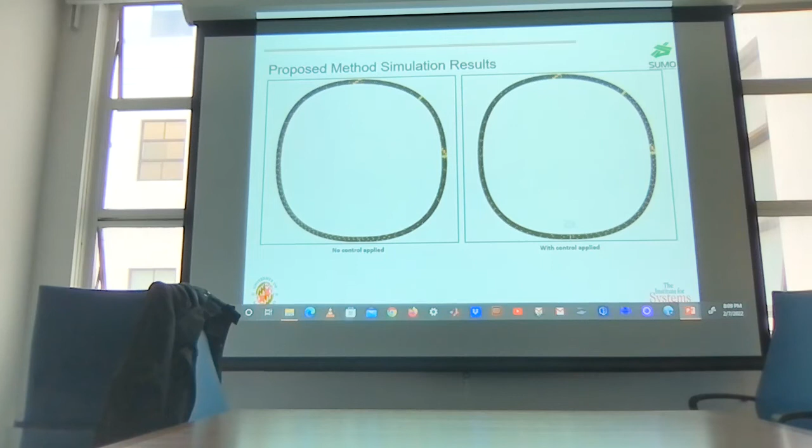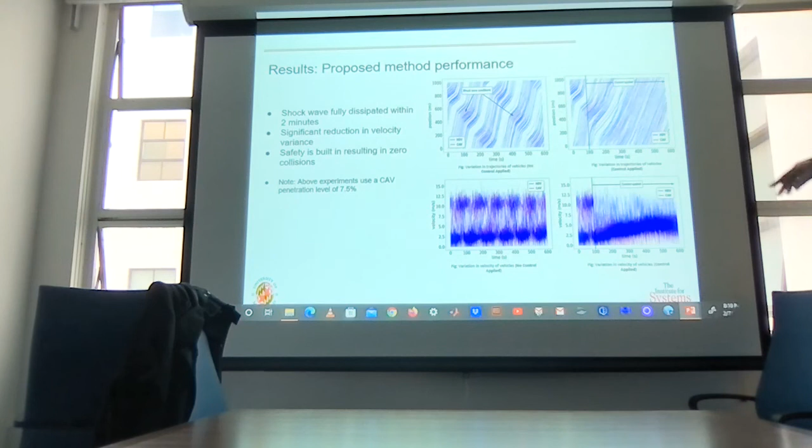You're going to see the way the shock wave is being created, and then when you have this, it gets dissipated. And you can see here, if you model the position versus time, how the shock wave gets dissipated, which is the control. And the current challenge is, you have to ask, what happens if I have 2 vehicles, 4 vehicles, 5 vehicles, where do I place them, and what's the impact of this on the mitigation of the shock wave?

And the last thing I have is this particular set of problems. We're trying to understand the following question. If you have vehicle-to-vehicle communication only, vehicle-to-vehicle and vehicle-to-infrastructure, and vehicle-to-satellite, each of them has different time scales. How much do you gain as far as optimality of the flow and all these problems? This is a problem that came to us from both General Motors and Ford.

Then a different set of problems, which I call complex traffic manipulation. You pass a car, you try to change lanes. How do you do these things effectively? So very simply, you have to pay attention to your sensors and understand how much of that is valuable, how much not, and when. You have to do navigation, actuation and control, and feedback. I'm not telling you anything that is not common sense.

Then we studied several problems here. These are the key problems we studied. I'll talk very briefly about these two: passing a car on a road like this, when you have cars going that way and other cars the other way, and changing lanes on a moving highway, and I'm not going to talk about the other one. Again, there are papers on this. My student Faizan Tariq worked on this problem.

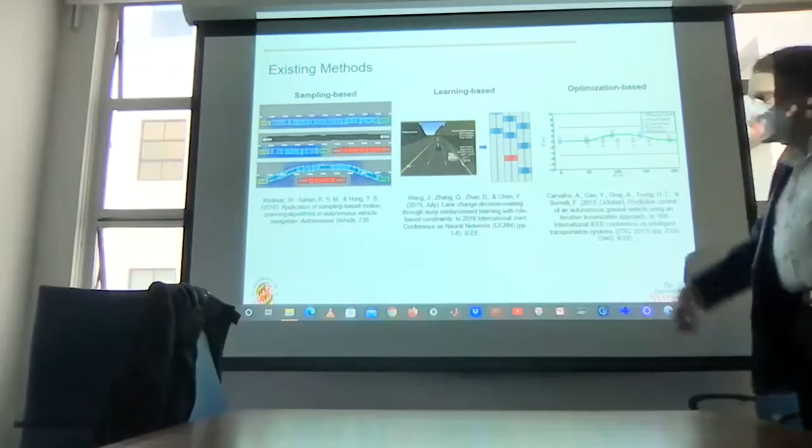I'll try to finish. This is work that has been done before on this problem, mostly by using optimization in these papers. We actually combine logical models and optimizers. So we did stochastic controllers with logical constraints, totally formal models, in different papers.

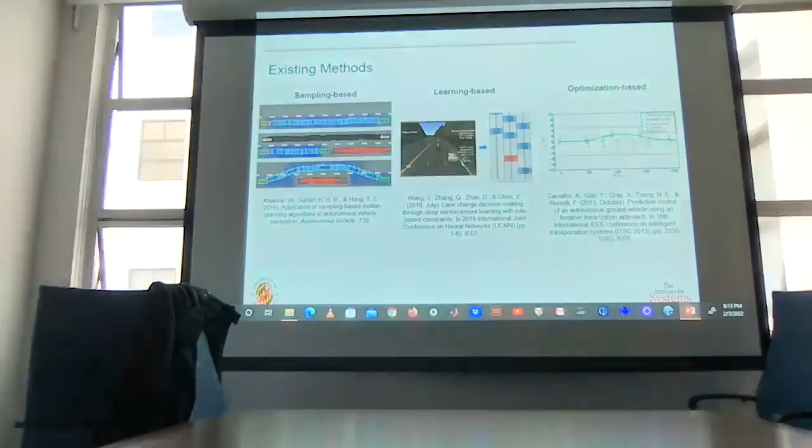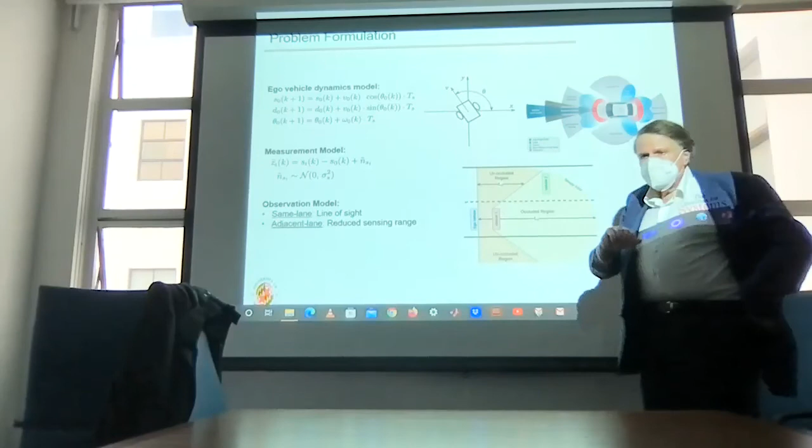And the key, again, is this. The current sensors in the cars are very rich. So they allow you to reconstruct very easily what's happening around you, and you should exploit that. And then the controls become actually very simple.

All right, so let me finish. What else I have? Sorry for skipping.

Yeah, we have similar things for various performance curves and so on and so forth on changing lanes. There's a comparison of the throughput and all that you can see. So I'm running out of time, so I'm going to skip this part. If you're interested, I can talk offline. Go to the final things I wanted to say. Sorry for that.

Okay, this is it. So quite often I go to talks and people use the term AI. And I ask them, what do you mean by AI? And I can tell them here an answer. This is what we mean today. Okay? So there are 3 challenges here.

We are close to getting some reasonably universal architectures and mathematics for deep learning, where you actually control the complexity of the deep network. This is the work of my student Christos Mavridis, who just finished. He has done exceptional work in improving some areas of work I have done, where we basically did a learning algorithm, but with batch processing.

He added to that real-time progressive learning, so you can actually start learning right away by adding to what I did before, something which is called deterministic annealing. And that actually solves the number of clusters you need, because it creates as many clusters as you need according to the data you have.

Second one is you have to actually understand what's going on with these non-von Neumann architectures. Remember, there were neural networks that were called synaptic networks, where all the activity was in the synapse. And then computer science very cleverly did something that's called in-memory computation. So they showed that you can actually use this to actually do computation. The motivation for that is in your brain it's the same substance, and you do both memory and computation.

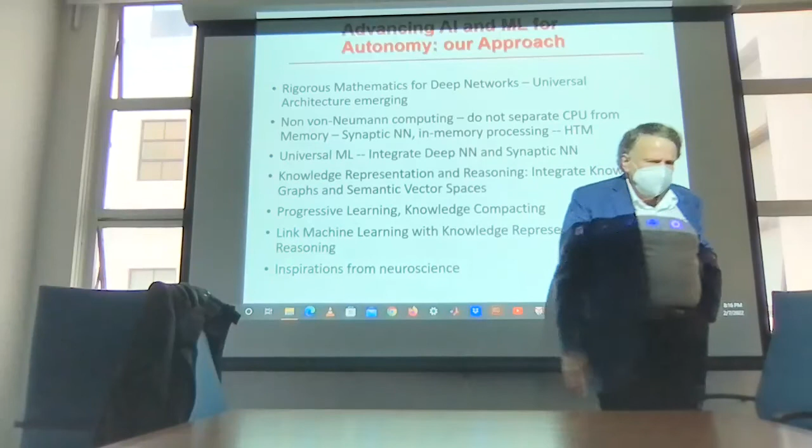There are two fundamental models for that. One is knowledge graphs, which is also called ontology in old stuff. And a more recent concept was this idea of semantic vector spaces that became big because of work in natural language processing. And it is in natural language processing and in general speech and sound processing that these two models of knowledge representation have been integrated. And quite a few people attribute the progress in speech, automatic translation, and other things to this idea.

Unfortunately, it has not happened in any other data field, this integration of knowledge graphs with semantic vector spaces. So this is challenge number 2: to create an integrated model. There are advantages for using this or using this, okay?

Okay, and the last thing is to link this knowledge representation and reasoning with the universal machine learning, right? Then I give you the right to call whatever you come up with AI. Because you will have the ability to learn, store, progress, condition, and so on and so forth, okay? And you can start proving things of what it can do and cannot do.

I'm not saying this is the only way to do it, but at least in the work we are doing, we are trying to go along this path so that when somebody asks us what do we mean by AI, here is what we try to do. Okay. And with that, I think I'm finished.